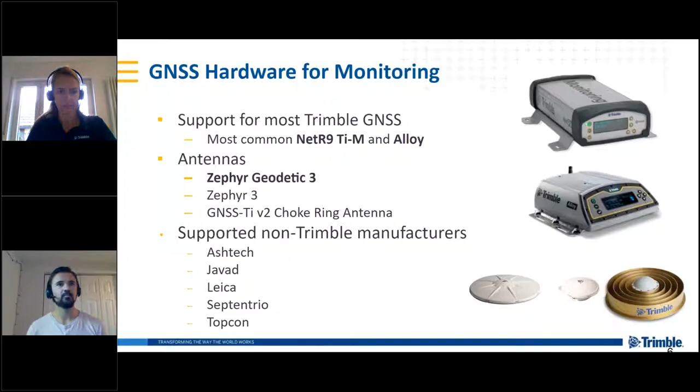T4D also supports several non-Trimble GNSS receiver manufacturers. So if you have receivers already that you want to use for monitoring, that is possible. And here is some non-Trimble manufacturer GNSS that we support. And if you'd like more information on specific receivers, we can provide that information after the webinar. All right, so we've talked about the receiver piece. Now let's get into the T4D server.

So in T4D server, you're configuring your receiver for how to process the data and how to make good decisions from it. So there's primarily two ways of doing that. There's the real-time GNSS, which provides faster reaction times after movement, but is limited to shorter baselines. So a primary example of this would be bridge monitoring, where you have movement that's happening in short intervals, and we need to know that movement in less time.

While with the post-processing side, we're using the stored raw data from the GNSS to create more accurate results. This is better for longer reaction times, or where you're expecting slower movement over a longer time. And also if you have longer baselines between receivers, this is the more useful processing technique. Common scenarios for this are in earth movements or geophysics, in areas where that movement might not be happening in minutes or hours, but maybe over days, weeks, months.

And one key thing to note, and really a powerful capability of T4D, is that we can run multiple GNSS engines in parallel while in T4D. Now, breaking that out into a workflow, and we're going to cover this in the demo, is what we need to do to set up a real-time or a post-process workflow in T4D.

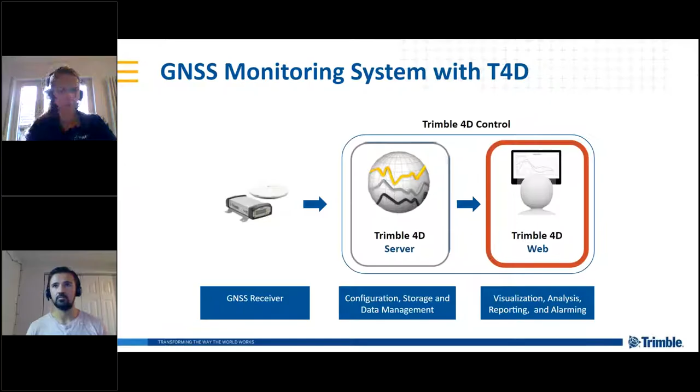So the last piece of the monitoring system is T4D web, and this is the real end goal, in my opinion, of what we're trying to get from monitoring, and that's the visualization and the deliverables from the data. So there's a variety of reports and ways that you can analyze the data in T4D, as well as analyze data from multiple sites and areas. So if you're not just monitoring one area, but maybe multiple sites, you can do that all in T4D. And here's an example of a real-time GNSS report.

Another key deliverable is the alarming functionality in T4D. So we can configure alarms to inform key stakeholders of critical movement that's happening. So there may be a variety of people on a project that need to know, whether it's the geotechnical engineer, the contractor, whoever it may be, they need to know about this movement so we can make better, more informed decisions of how to go forward.

And with that, I've talked enough. So let's get into the real exciting part of the presentation, I should say, which is the demo. So I'm going to pass this over to Daniela, and she's going to show us some exciting stuff about receivers and T4D. So Daniela, you should get the presentation right here soon.

Yeah. Perfect. And I can see your screen. You can see? I can see your desktop, yeah. Yeah, okay, so I have to figure out which desktop to show.

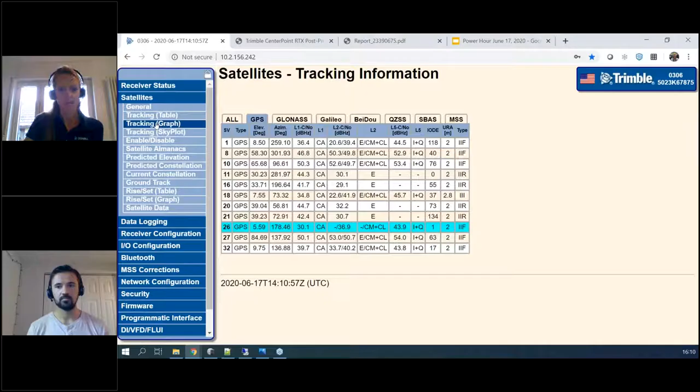And here on this receiver, we already have 3 outputs available. And I want to show you how to create one more TCP/IP output and how to connect to this. If we are looking at the satellites, we can see here some general information about the tracked satellites. We have satellite tracking information. We can also see the tracked satellites in the sky plot and enable or disable certain satellites.

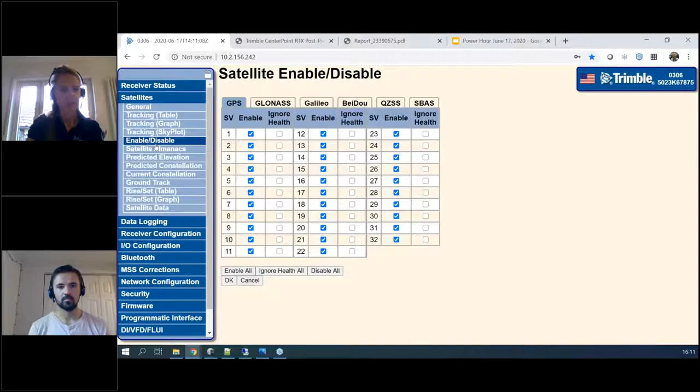Data logging is configured here, but I don't want to change this now, but I want to show you the IO configuration where the connection to T4D server is configured. You see in green here the 3 active connections we have, and I want to connect to this port. This is port 5023, and I want to stream an RT27 data stream to T4D, as this is the Trimble format for transferring data to other software like T4D.

So here I have different options to allow multiple connections or some security, but I don't want to use this now. So in the summary, you can see that I'm outputting RT27 data in a 1 Hertz interval. The NetR9 itself is able to track and output up to 50 Hertz. In T4D, we support up to 20 Hertz, but for my demonstration, I'll use a 1 Hertz epoch interval now. So this is all configured, and I can open my T4D. Here in T4D, I need at first one parent module.

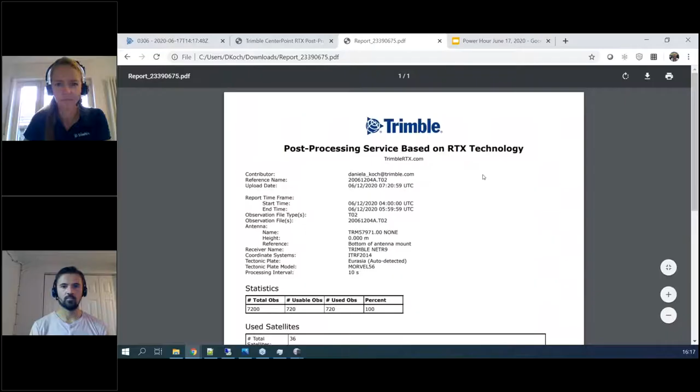And we see here also again the manufacturer, and the decoder group is the next setting. Real time is the same as RT27 selected in the receiver, so I have to go with this. In the next step here, I have to enter the IP address of the NetR9, and this was 10.2.156.242. And the port I've selected was 5023. So I select this.

In the receiver data, I can define an elevation cutoff and again a tracking interval. And here you can see again that T4D is able to track up to 20 Hertz. Normally I'm using here now 1 Hertz. I could enable another internal data logging session in the NetR9, but I don't want to use this. I don't have an external sensor connected to my NetR9. And in this demonstration, I don't want to show storage integrity.

Storage integrity is in general a nice feature if you have, for example, a communication problem and the T02 file or the raw data file stored on your server is not complete. T4D can connect to the NetR9 automatically and download the internally stored file from the receiver.

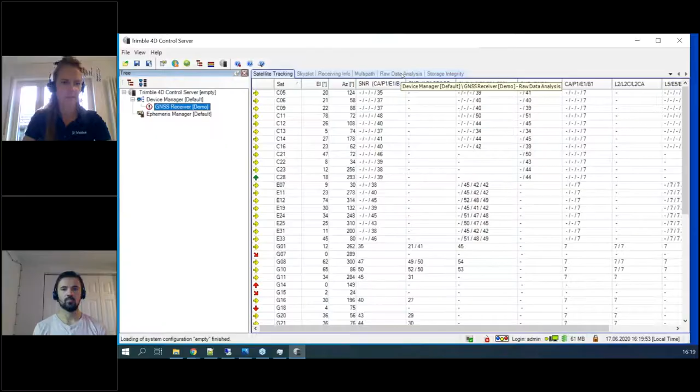Yeah, we have several views here. For example, the satellite tracking view, a skyplot view, the receiver info. A multipath view is also available where we can show the multipath. This is calculated over time. So if the receiver is running for some time, it would be displayed all here where you have a lot of multipath on your station.

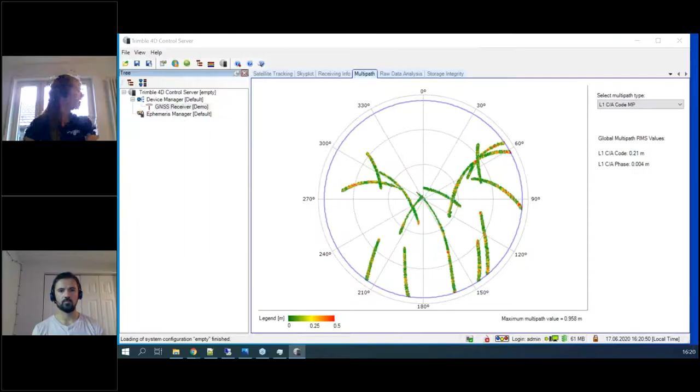Beneath the GNSS receiver, I will add a storage module. I'll use, in this example now, a T02 storage. We have different formats here available, like RINEX, some older formats, or T02. You define a path where you want to store the data, a kind of folder structure. Enhanced day creates a new folder for each day, and you can also define again the data rate.

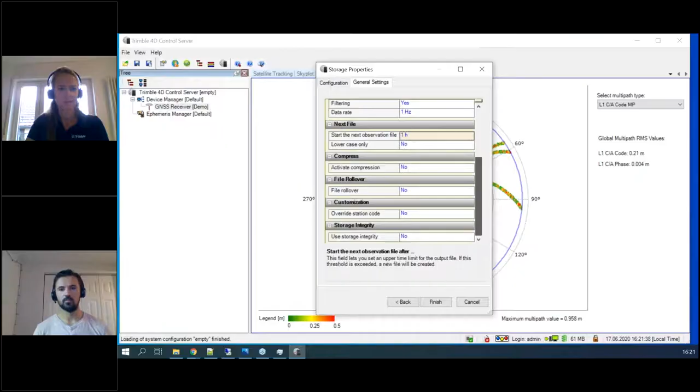Here you can define when a new observation file should be started. I'll choose 1 hour, so I have 1 file per hour. For the compression, I don't want to do this as T02 is already compressed. So here we see that the file is stored and we can see some history.

With a GNSS receiver, T4D automatically adds a module called Ephemeris Manager. And here, normally you have more than 1 receiver. The ephemeris manager takes the ephemeris from the receiver, the broadcast ephemeris, and also predicted or precise ephemeris, and forwards them to the processing engines.

Yeah. Okay. For the next part, I want to use this demo system. So this is basically now also my second part here. I have already configured a T4D system, and the system is running since over a week now. And I've configured here 3 receivers.

The receiver Höhenkirchen is on top of the TerraSat office close to Munich. The station Hohenbrunn is around 3 kilometers away, and the station Saglerstraße is only around 300 meters away. So it's next door. The device manager here shows an overview of the stations. We see the station name, ID, code, the receiver type, decoder, firmware, and the connection.

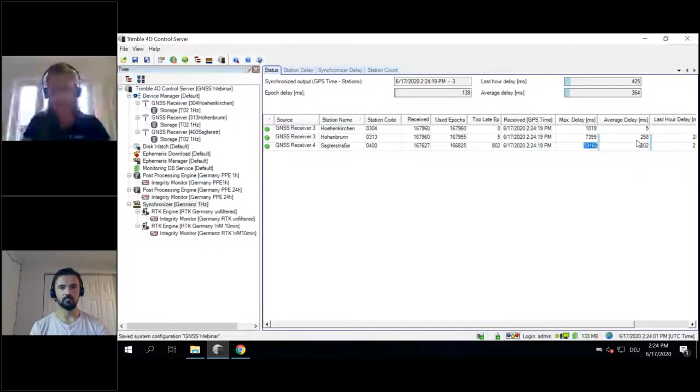We have some views here where we, for example, can see the maximum delay and average delay of the stations. And if we want to troubleshoot this, we can also look at a station delay, where we can see that, for example, the close station has not that good internet connection and more delays than the green one and the gray one here. So here the delay is very low.

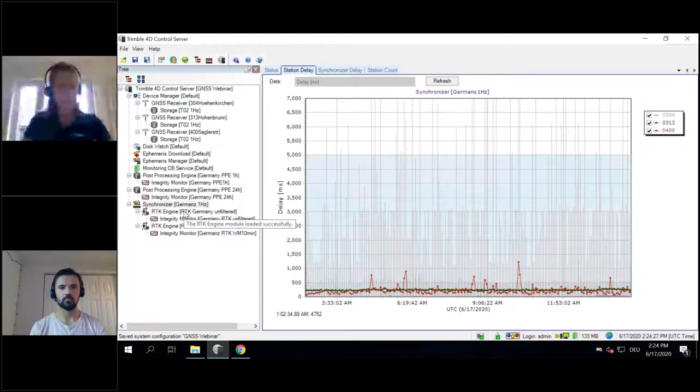The RTK engine does the baseline processing. The library used here is basically the same library as, for example, used in TBC or other Trimble products, and yeah, it calculates baselines. Here we see the two baselines which are created. We see the baseline length, the position status, the solution, orbit. Yeah, now we see that we have a little outage probably in one of the stations. And we see also that we use the orbit mixed.

In this case, I have also an ephemeris download module. And here I'm connected to the University of Bern to download ephemeris data, which is then used in T4D for the processing. We have here the option to connect to the University of Bern or to IGS to download the files.

We have already the available predicted orbits, and you can also download the precise orbits. They are available after around 2 weeks, so I'm not using it here, but yeah, it is possible to do a processing in T4D in the post-processing engine using these orbits, but then we have a delay.

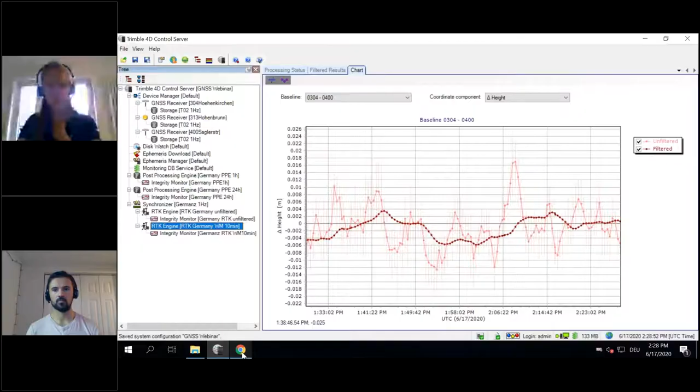We can see here the unfiltered result, which are going up and down. And the filtered baseline here is much smoother. So filtering is something very good because the data is much smoother, but the downside of filtering is that if something is moving, it takes a while until the results show this.

This is a screenshot of a test we did some years ago, and we moved in this 3 kilometer baseline one of our stations up for 10 centimeters. And you can see here that it takes exactly 10 minutes until the results show the movement of the 10 centimeters. In the baseline view here, we see the same. The unfiltered results show the 10 centimeters basically in the next 2 seconds, but the filtered results take 10 minutes again.

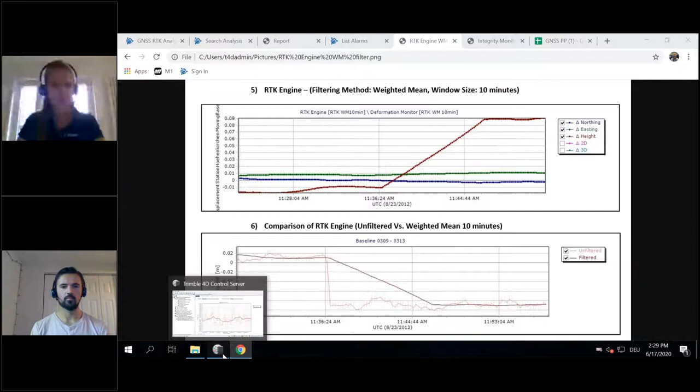The last module we need for the real-time monitoring is the integrity monitor. Here we are performing a least squares adjustment, which is of course with only one baseline, not a real least squares adjustment. Here I have a photo. Sometimes I'm building up a demo system like this. And this is also what I would recommend more, to have 2 fixed reference stations far away from the monitoring area. And here the green lines between the stations are the baselines. And here we are performing a least squares adjustment.

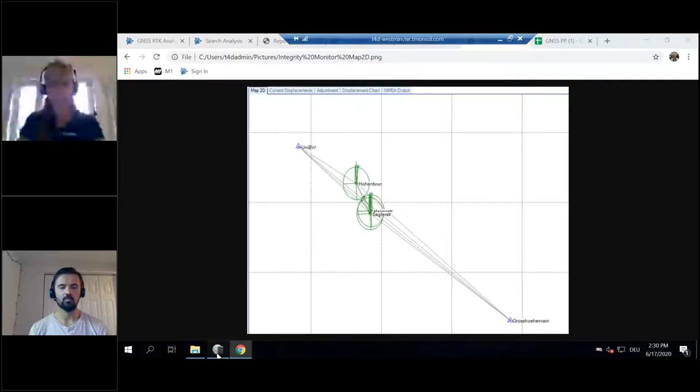The current displacement shows the delta northing, easting, height, 2D and 3D, and also the sigma values. The integrity monitor has a simple displacement chart where you can see the result. Here you can always see the result of one of the stations. Hohenbrunn didn't have an outage. Normally Saglerstraße is not that stable.

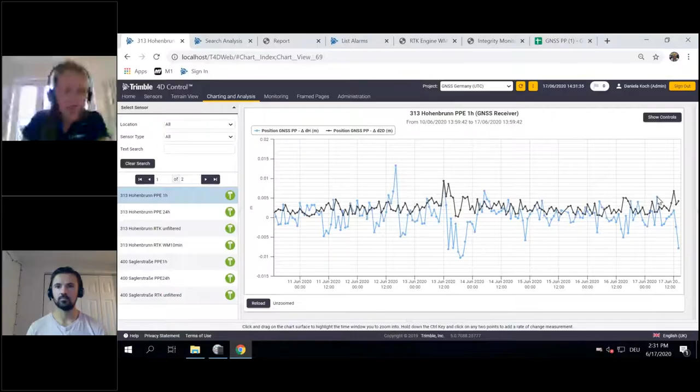But for T4D Web, it's much better to use the charts or analysis in T4D Web to analyze your GNSS data. In the charts view of T4D Web, you can see a simple chart, similar to the chart in T4D Server, and you can also create analysis. For example, here I've created an analysis which shows my 2 stations, and I selected to have a rolling window of the last 7 days. So I'm always showing the results of the last 7 days.

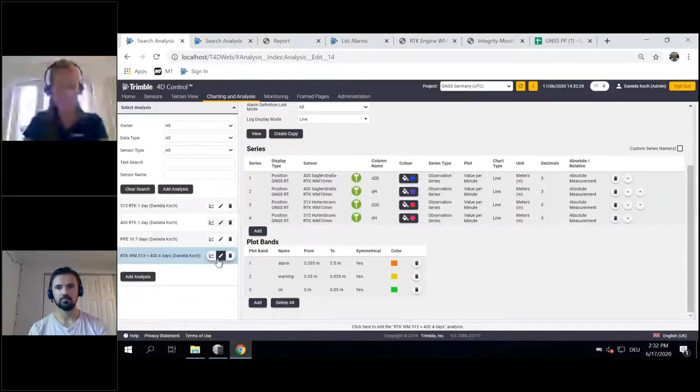I'm also showing some log types, which we will see later. I defined that everybody connected to T4D Web can see this analysis. And I defined here to show the 2 receivers, Saglerstraße and Hohenbrunn, always in 2D and height. And I also defined some plot bands to show the alarming and so on. Here I'll pop up the chart to show the data.

So while that chart is generating, we have had quite a few questions come in. One I think is a good question to ask. The question was around RT17, RT20, RT27. When you set that in the GNSS receiver web UI, is that information used in both the post-processing and real-time monitoring solutions?

Yes, for real time this is used. For post-processing, we basically store the RT27 data later in the storage module, but I'll come to this in the post-processing part. Perfect.

Okay. Now the analysis here is loaded, and we can see at first, for example, the results of Saglerstraße. This is, for example, the 2D displacements. And here you can see in the last 4 days that the variations are very low. They are beneath a centimeter.

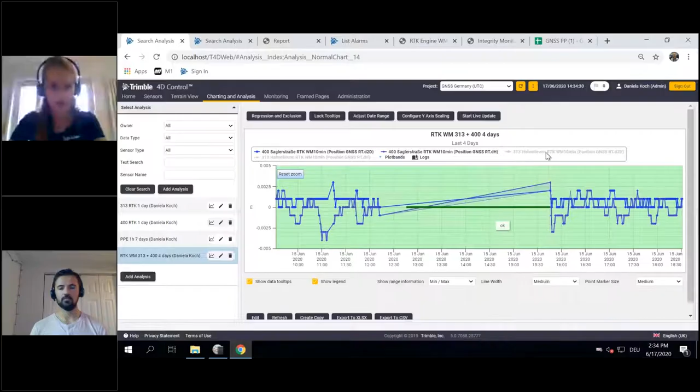This is the longer baseline to Hohenbrunn. Here we can see the height variations. They are often in the range of 2, 3, 4 centimeters. But looking at the 2D displacements, they are also much more stable here, around 1.5 centimeters.

Now, if there's no question about the RTK engine, I can start the part about the post-processing, or do you see any question? There are a lot of questions, so maybe let's answer one and then we'll save the rest for the end.

This one is in relation to the RTK engine. The question is regarding the NetR9. We know we can calculate an RTK position using the NetR9. Is the RTK engine in T4D the same as would be used with the NetR9, let's say with a different RTK position, from using a field controller or a different method? I'm not sure about every Trimble controller, but for the NetR9, I know that internally the same RTK engine is used.

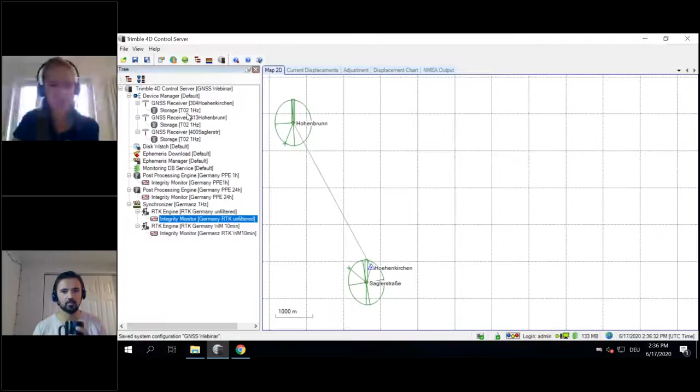Okay, so I'll go on with the post-processing part. Besides my GNSS receivers, I also have a T02 storage where I'm storing 1 Hertz data in 1 hour files. We can see in the history that this station is complete. In the meantime, Hohenbrunn is also back. We didn't have many outages, but now we have some missing epochs for the outage we just had. In the storage module, you have some properties with a folder path and folder structure, and the post-processing engine has basically the same settings.

So you select the folder structure, the file type, and which station should be processed. We can define a start time here. This is normally the time now. In the post-processing engine, you could also stop the engine and change the start time back to some months ago if you want to reprocess things, or add another storage module with another interval.

We have a session duration here, which I'm also using, the 1 hour. And in this post-processing engine, I'm using a session duration of 24 hours. I have a delay here of 2 minutes. This is mainly because the storage files are written after the hour, and sometimes the compressing takes a little bit, so that we don't have a file conflict, I'm waiting for 2 minutes.

In T4D Web, I also created one analysis for the post-processing engine. Here I'm using the last 7 days, and I have the 1 hour and the 24-hour sessions, always in 2D and height. Looking at this analysis, we can see the results. I'll show only one. This is the 3 kilometer baseline to Hohenbrunn.

Here we see the 2D results. They are around here. We had one outage here over a centimeter, but otherwise they are very stable. The height has more variations, around 2 centimeters, I would say.

Saglerstraße has a smaller baseline. Here in the 2D, we have 2 millimeters of variation, and in the height, it goes up to 1.5 centimeters. Looking at the post-processing, we see really only a few variations, 4 millimeter or 6 millimeter in the height, and in this case, 1 millimeter maybe in the 2D.

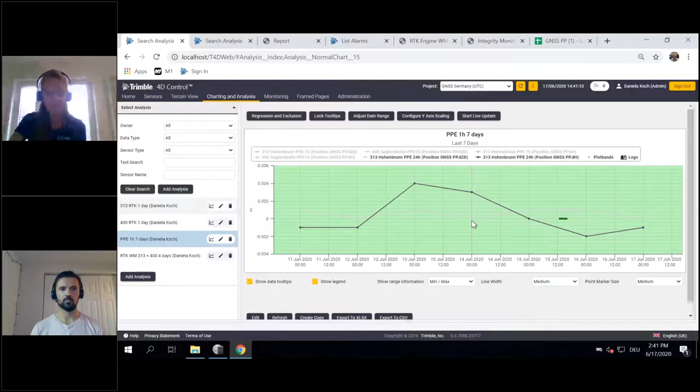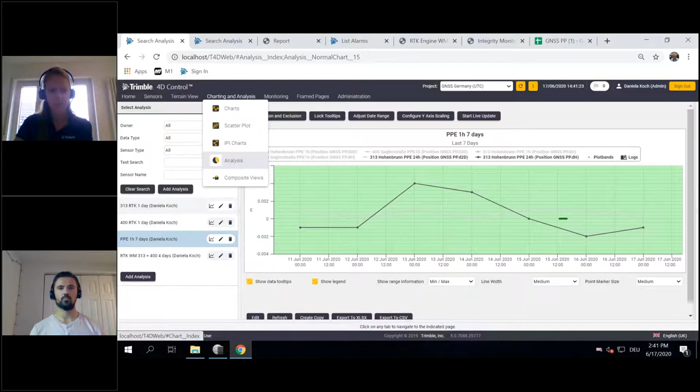Looking at T4D Web is one thing we can do, but what I would recommend everybody is creating a report. T4D has several reports available: alarming report, analysis report, log report, sensor reading, and status report. And I have some predefined reports here. So for example, in this report, I've defined that I want to have a report every day at 8 o'clock when I'm coming to the office.

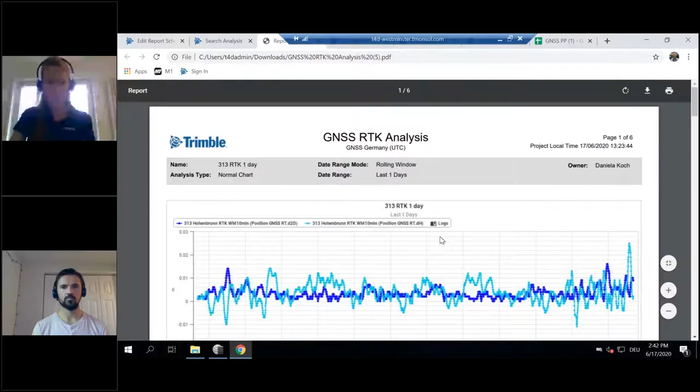Only I get the email, and here I want to see in this report the analysis of the RTK engine of the last day of the 2 stations and post-processing engine for 7 days. I think I created the report here. So every morning you get a report showing the displacements of the last day, the summary, the other station, and post-processing engine, in this case also the last day or the last 7 days.

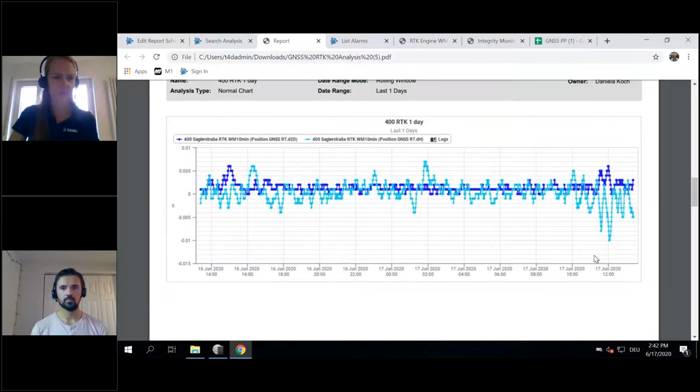The report of the positional sensor reading, so I defined here a few things, but I'll show you this on the report I've created before the meeting. So here you can receive a report with the raw data. I selected now every column. Normally you would not have every column and select what you want to see, but you basically can see the sensor name, alarm state, data type.

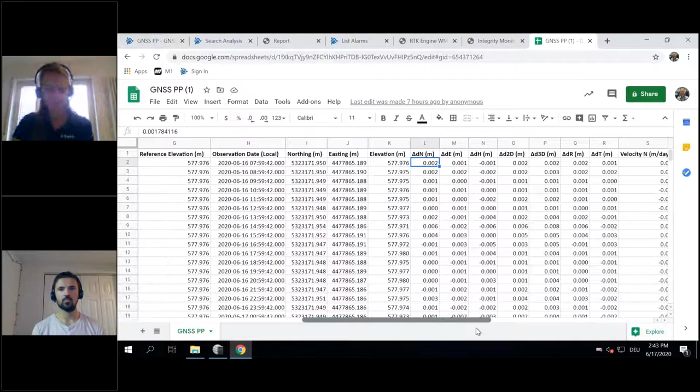We have reference positions here, the observation date, northing, easting, elevation, and also the calculated northing, delta northing, easting, height. In T4D Web, we also have the possibility to calculate velocities, and they are also displayed here. So this is a report with all the readings.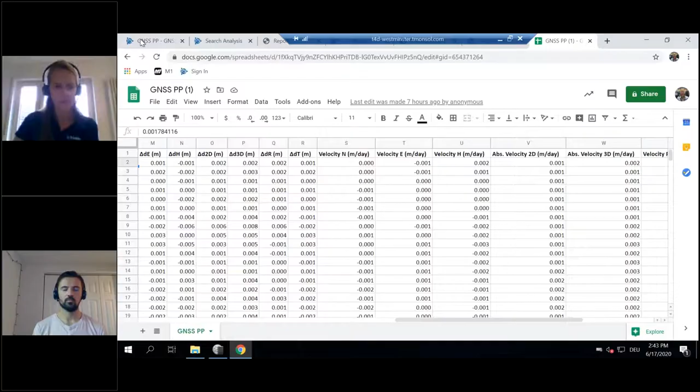The alarm report generates an overview, if I'm previewing this one now, with the alarms that are happening. At the moment, all my sensors are okay. And we even had a little alarm this afternoon. I can show you here my alarm job. So I've created here an alarm job, so every minute T4D checks if the sensors are above these thresholds.

And we have a nice history view where we can see the alarms. So this afternoon or lunchtime, the alarm changed to attention. And we can look at the charts here to see that this time not the height was in alarm state, but here the Delta 2D, I set it to 1.5 centimeters, and this was a short time above the alarm.

Okay. Cool. So with the alarms in the reporting, someone could set up that only reports or notifications are sent to certain individuals when it goes out of the threshold. And then you could also have reports sent to you every day just to notify if there is any movement or if the sensor is working properly and receiving data. So there's a variety of things that you can have automated. Is that correct?

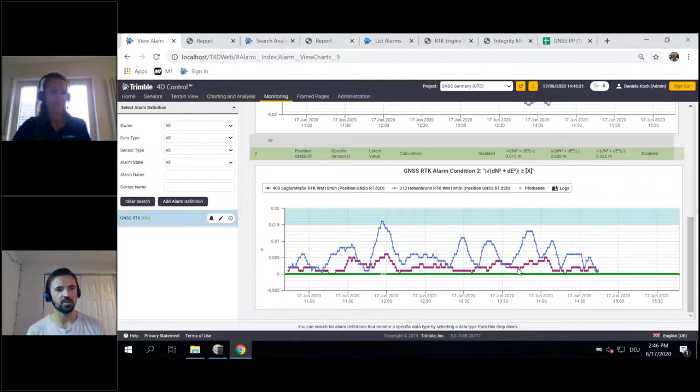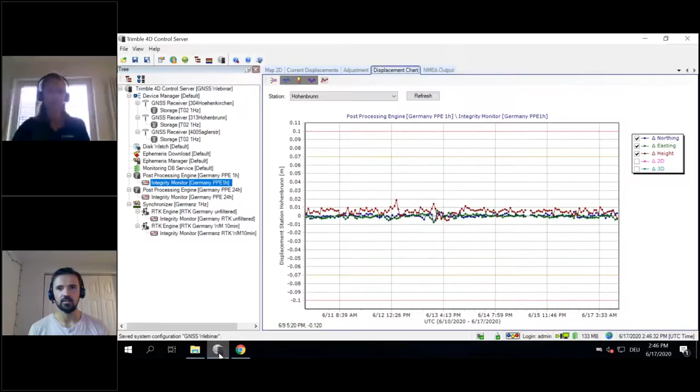Cool. So there were some good questions, and we still have quite a bit of time, so we can take a look at those. One of the questions, I answered this already, but I think it would be good to mention again. At the very start of the demo, you showed a web browser with the web interface for the receiver. The question was, is that what the receiver interface looks like for the NetR9? And the answer is yes. It looks very similar for essentially all Trimble receivers.

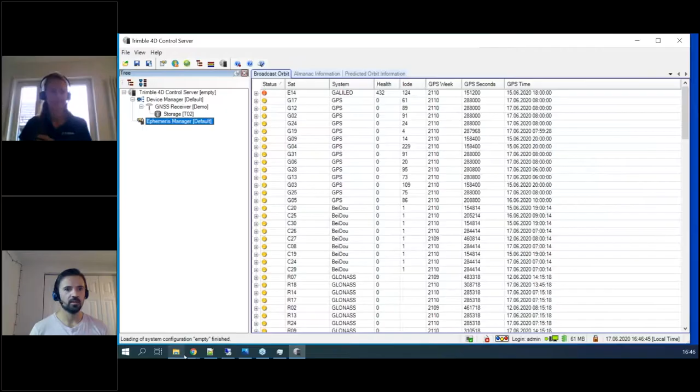So if you're connected to a receiver, let's say over an Ethernet cable, and you put in the IP address in a web browser, it'll pull up that receiver interface, and you can configure some of the settings and data streams. Let's see, there are some more questions here. This is a good one. Is T4D using GPS L5 frequency in the processing?

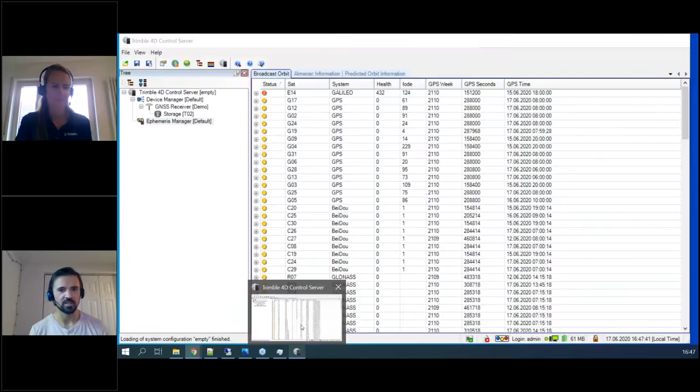If you don't know, we may have to get back, or I can look in the document really quick. I guess we have to go back because I think yes, but I'm not 100% sure. Yeah. So thanks for the question. That was from Jaideep. I'll get back to you with an answer on that. The receivers themselves can receive that frequency. I'm not sure at this point if we're processing it in the baseline engine or not, but we will get back to you with an answer on that. Thank you for the question.

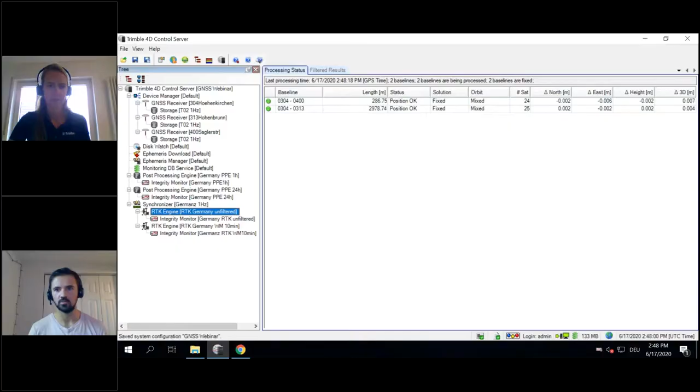All right, so that covers most of the questions for right now. If anyone else has a question, feel free to enter that in the chat window, and we still have 10, 12 minutes. Would you like to show anything else in T4D server web, Daniela? No. All right, so let's see, hopefully everyone can see my screen. Yeah, looks good. Perfect.

So we'll just finish up with a summary of what we just covered. First was why we use GNSS for monitoring, the different scenarios where you may use it. The Trimble monitoring system components. As well, Daniela got into how to configure and set up the receiver, the antenna in T4D server, and getting out the data and reports and alarms in T4D web. And we also talked about the two different types of results that we can get, so the post-process versus the real-time GNSS, and the various outputs and deliverables that you can get from T4D for whatever type of monitoring project you may be working on.

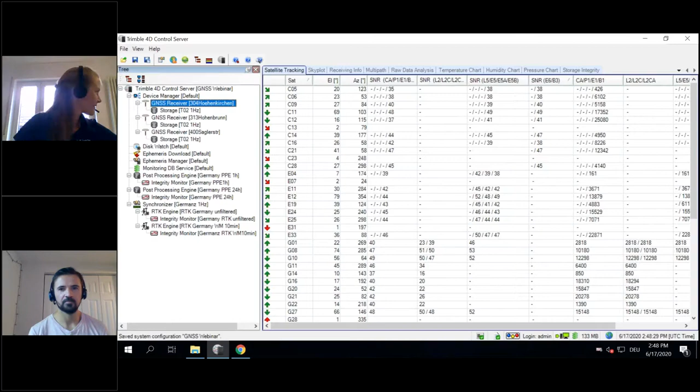Did you want to share your screen to show that? Yeah, I'm still showing mine, so I can switch it to you. Yes, we can. That might give a little bit better context to everyone on the call. My screen. Yeah, I can see T4D server. T4D web. Yeah.

Okay, so you can define notification recipients. At the moment, only I get the results or the alarms. In the administration, you can define what kind of results you want to have. So I decided that I only want to have emails. You can also get SMS, both, or web notifications, or in the alarms, you could also start a batch file to start some automatic process. I hope that answered the question. I think it did.

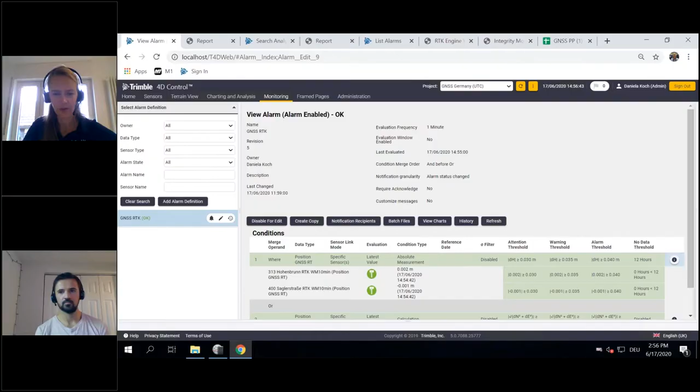And then there was also another question from Samir about setting alarms for sensor failures, and I think that would be through a similar process. Is that correct? Yeah, so here I defined, in general, that I want to have an alarm if I don't have new data after 12 hours. So in T4D web, you can define a no data threshold, and then you get an alert if your receiver is down. You can also put this to 1 minute, but then you're normally spammed with emails.

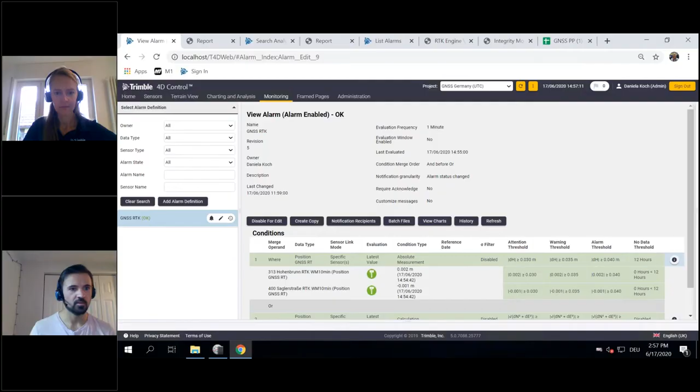So Danielle asked, regarding the post-processing GNSS method in T4D, is it using static processing or PPK method, which is post-processed kinematic? So we also have here the processing mode. By default, it uses the processing mode static, and this provides then, in my example, in the 1 hour session, one result for the last hour.

If you insert a new post-processing engine, you can also use the processing mode kinematic. I can show you this here. And then, after the hour, it would reprocess the file in kinematic mode to show the offsets. This is normally not used because then you could also use the RTK engine. In normal monitoring, this is more used if, for example, an earthquake happens and you know in this file there was the movement and I want to know exactly at which minute. You can reprocess the file in this kinematic mode. Very cool.

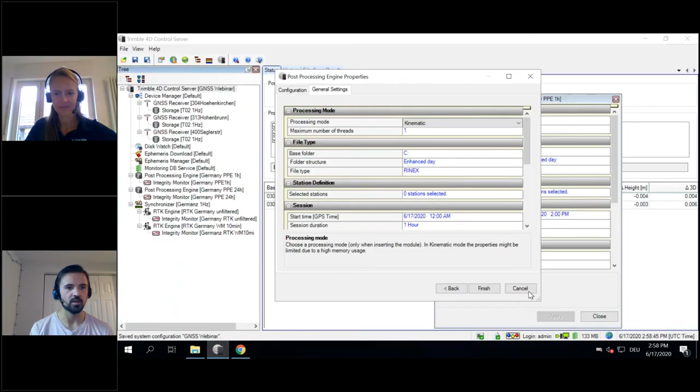Is there a limitation on the number of receivers that can be used? No, this depends on the server configuration. I mean, T4D server is the same as the Trimble Pivot platform. There we have systems with 200 GNSS receivers or more. In monitoring, I don't know a system above 20 receivers, but if you have a strong server, it should be possible. Very good.